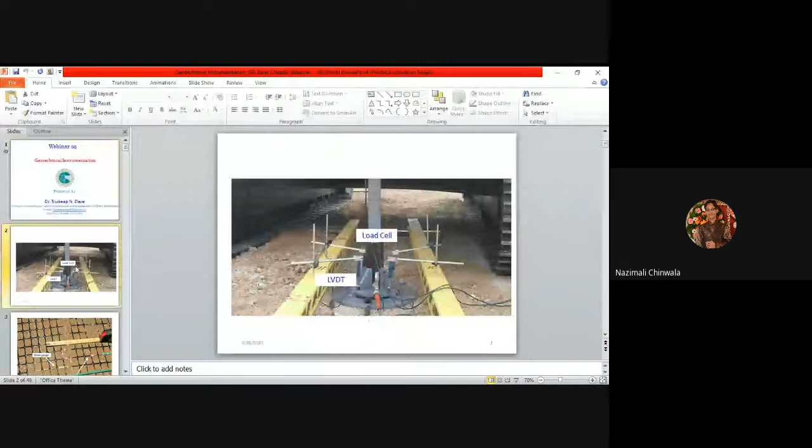When we talk about instrumentation, we may require to do the field plate load test, wherein we use load cells, LVDT, and we want to see what is the load displacement curve, or the load displacement behavior of the material at the site.

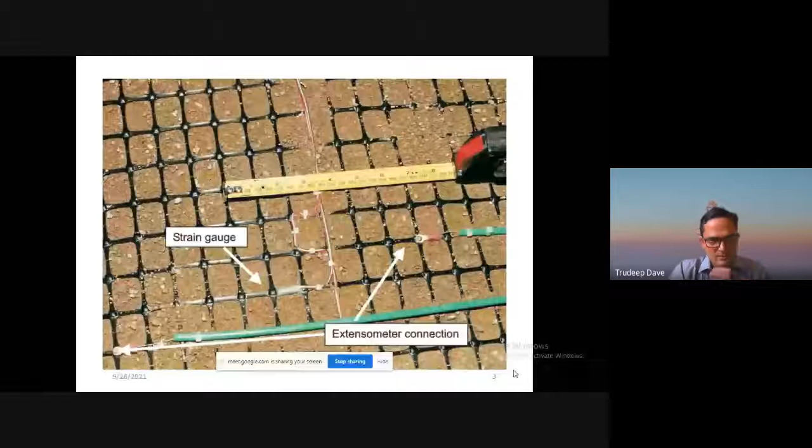We may require to monitor the strains which can occur on various geosynthetics, because it is one of the novel materials and most widely adopted nowadays in all construction activities. So if we want to see what can be the behavior of various geosynthetics, which requires monitoring the strains or the extension, we may wish to use instrumentation in the form of strain gauges or extensometers.

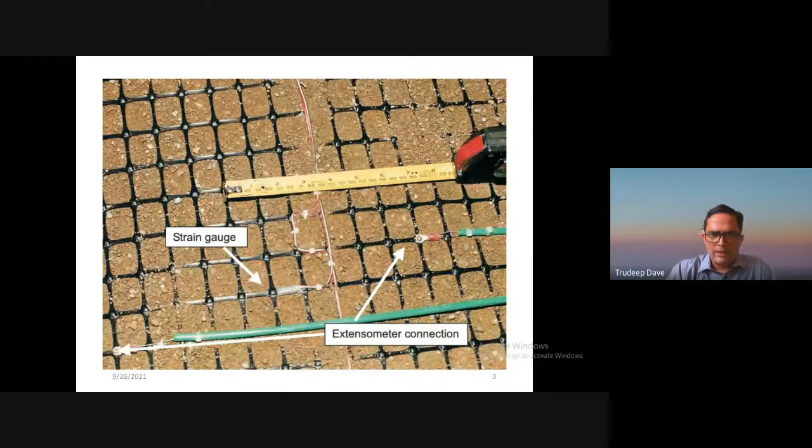In that condition, we may also have seen that various laboratory studies require displacement transducers or accelerometers, used during the shake table test or during the dynamic loading test in the laboratory environment as well.

So it has a large gamut of applications, basically ranging from laboratory scale to field scale. And that is the reason why we want to understand the appropriate or apt use of instrumentation, considering what is the application we are looking about.

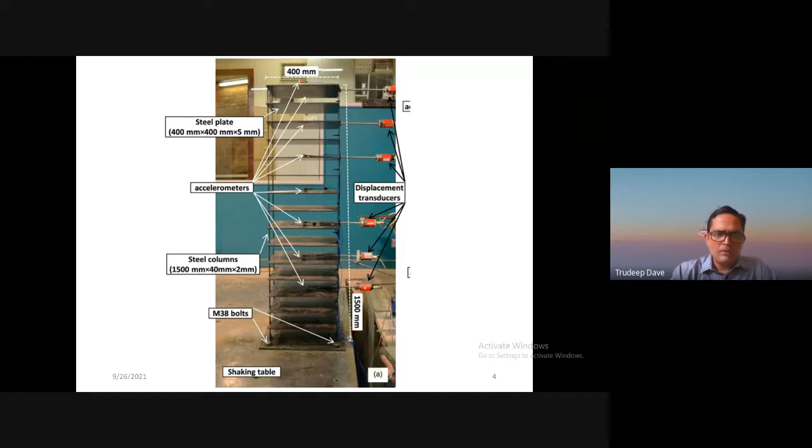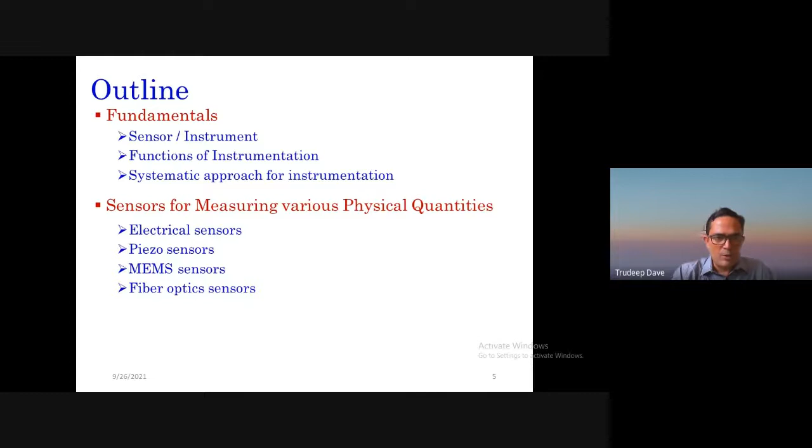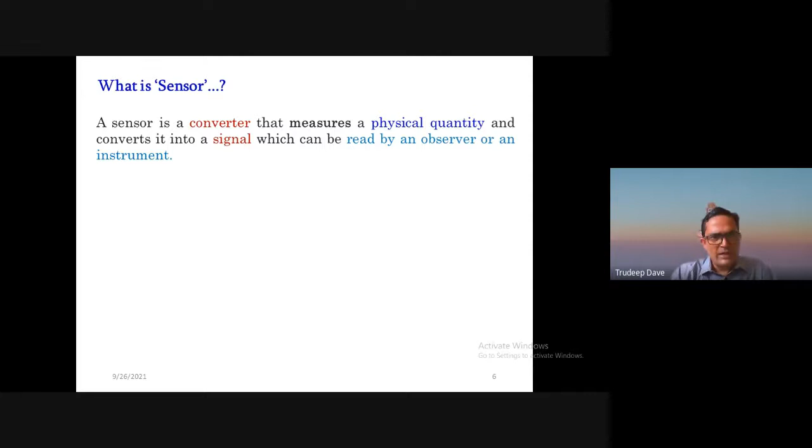So first and fundamental question - what is a sensor or what is an instrument? We can say that a sensor is basically a converter that measures a physical quantity and converts it into a signal which can be read by an observer or an instrument.

What are the physical quantities in which a civil engineer, or in particular a geotechnical engineer, is interested? We may say loading - varieties of loading, like overburden pressure or overburden loading, which can convert into gravity force, lateral thrust or wind loading. It can be seismic loading or traffic loading, or any dynamic load like blast. So depending on the loading source, we may require to monitor how much load is acting on the structure, then the structural response to that particular loading.

Because of the applied load, what are the strains occurring on the structure - whether tensile or compressive strain, displacement if it is taking place, how the displacement is happening, what kind of deformation or bulging is taking place - we want to monitor it. In many situations we may use inclinometer or tilt meter to see the response of the structure.

When we apply some sort of dynamic load, in those conditions we may need to monitor the acceleration which has been applied as a loading, if possible to monitor, and what is the response of the geotechnical structure in those situations.

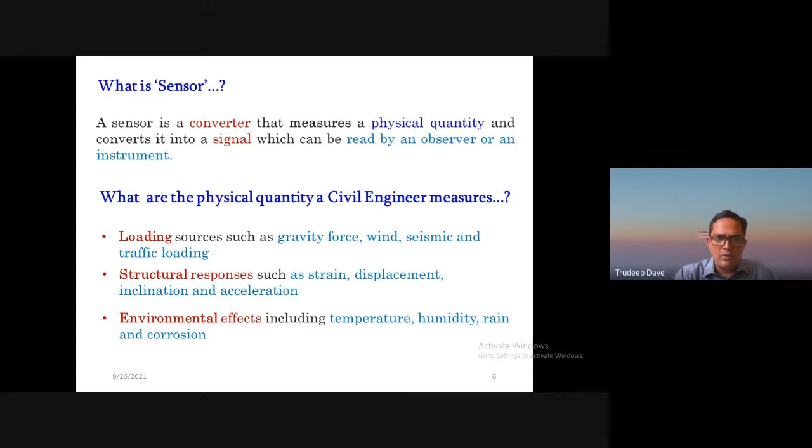After that, if we want to discuss the functions of instrumentation - this is something which we already discussed.

The third part of the first topic is a systematic approach to plan any monitoring program using instrumentation. Whether it is laboratory or field, we may require to monitor it.

What fundamental we need to look into is we need to define the project condition first. So when we say project condition, it means the loading, the boundary, the material, the parameters which we want to monitor - that also will be part of this monitoring or project condition.

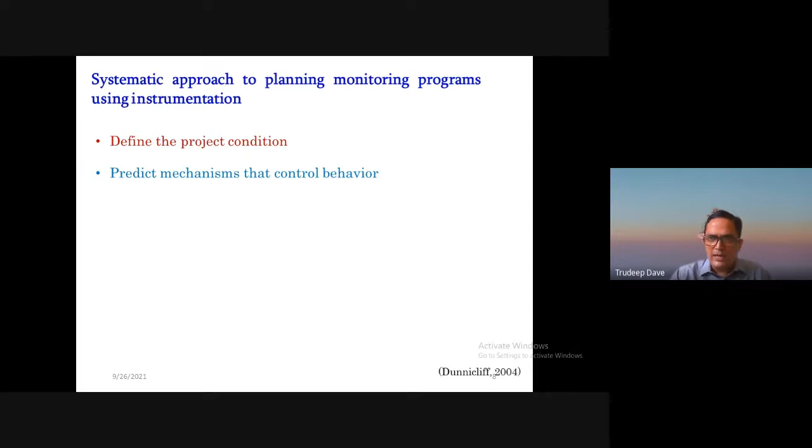Predict the mechanism that controls the behavior. So if we apply a vertical load, it is expected that a pressure bulb will generate, and based on the established theory, we can try to provide the sensors in the influence zone or the pressure bulb more, and as we move far, the instrumentation intensity can be varied or reduced.

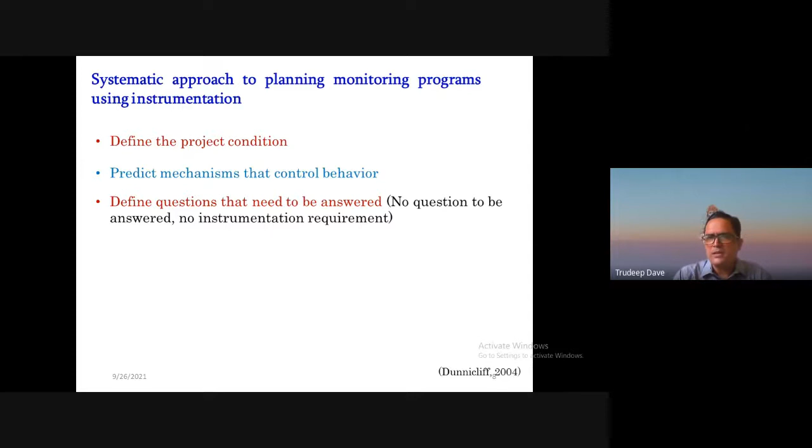Define the question that needs to be answered. Why am I doing this instrumentation, why this experimental study is important, or why the instrumentation is being used. If there are no questions to be answered, I think probably we need not do the instrumentation, but it is not the case. As we do the model study in the laboratory, small scale or 1G, or maybe large scale model study, in all those things we have a set of questions which we wish to answer, and based on that we try to provide the sensors.

Define the purpose of instrument, that is again related to the third point. If the purpose is defined, we can also think of which instrument probably can help us. For example, the scale of measurement - if I apply loading in the laboratory environment, the scale of loading would be different than if I want to measure the same in the field. So the same instrument which I wish to use in the laboratory may not be apt to use in the field.

When we talk about the centrifuge test, we may wish to use miniature sensors, which are very small in dimension and will not obstruct the phenomena occurring at NG level. But when we try to monitor the same thing in the scaled model, for example dimensions maybe 1 to 3 meters, and still in the laboratory, probably the sensor dimensions are such that they are larger than miniature, but should not be so bulky that it obstructs the phenomena to occur.

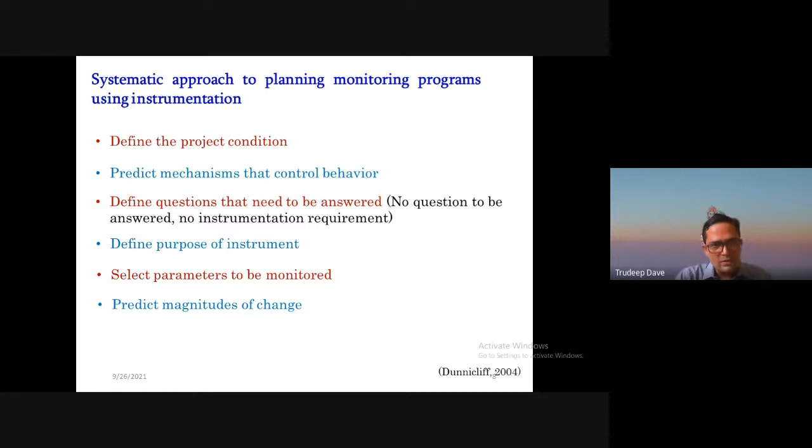Select parameters to be monitored, whether it is stress, strain, pressure, or displacement or any other thing, and predict the magnitudes of change. One is what is the fundamental minimum pressure, stress or strain which is likely to be there, and what is the magnitude of changes which could occur. That is also required to be predicted - not exactly, but it will help us select a proper instrument. So these are sort of required things.

If we say that this instrumentation along with the data logger is basically forming a health structure or maybe geotechnical health monitoring system, basically it consists of a sensory system. Then the sensory system is connected to the data acquisition system. If it is required to be amplified, then some transition may also be there.

Basically it will help us to monitor, and then whatever data we are getting, it will be the input to the computer, and we'll try to do the data processing, and we'll try to analyze what are the results or what are the outcomes which we are getting from the system.

And we need to manage the system. Many a time what happens, we get some noise, we get some disturbance, and all those unnecessary things are required to be filtered. After that, we need to make the decision.

If it is about the laboratory, we can say that this is the phenomena which is observed. If it is about the field, and if the behavior is not as desirable, and if it is exceeding the limits, we need to make some decision in the form of some sort of retrofitting, or some sort of strengthening. So all those things will come into the picture, but that is a part and parcel of the instrumentation.

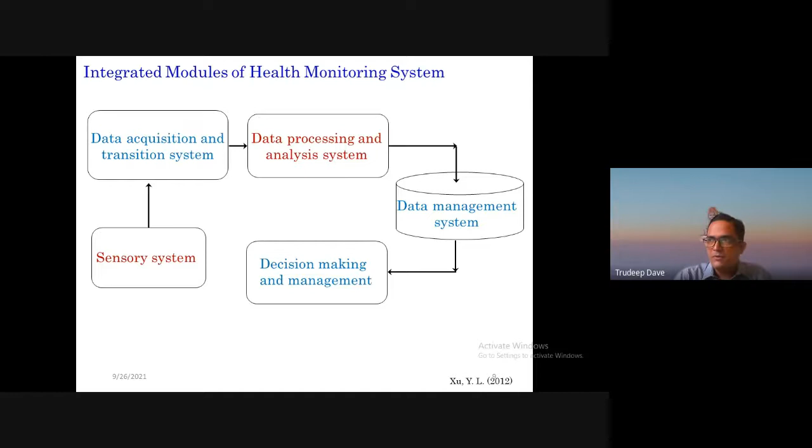So if instrumentation is done, we can monitor it more precisely as compared to doing the retrofitting once the distresses are visible by naked eye, or once the failure has taken place. So it is better to prevent it with the help of instrumentation than doing the remedies.

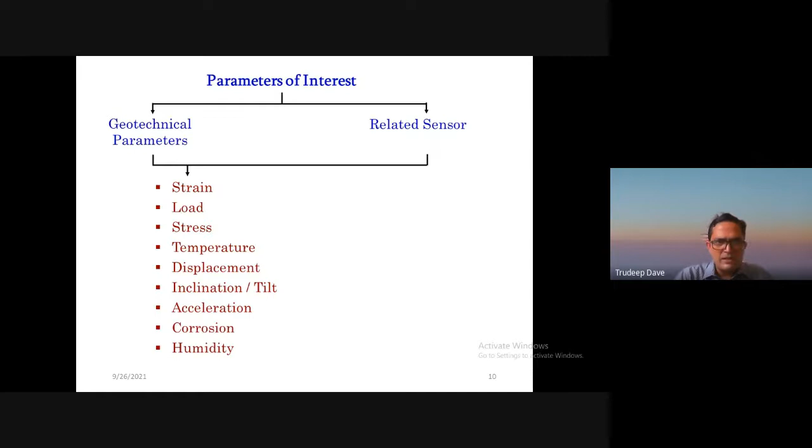Based on the parameters which a geotechnical engineer is interested in, we can have strain, load, stress, temperature, displacement, tilt or inclination, acceleration, corrosion, humidity. These are some of the basic things which geotechnical engineers or geo-environmental people are looking into.

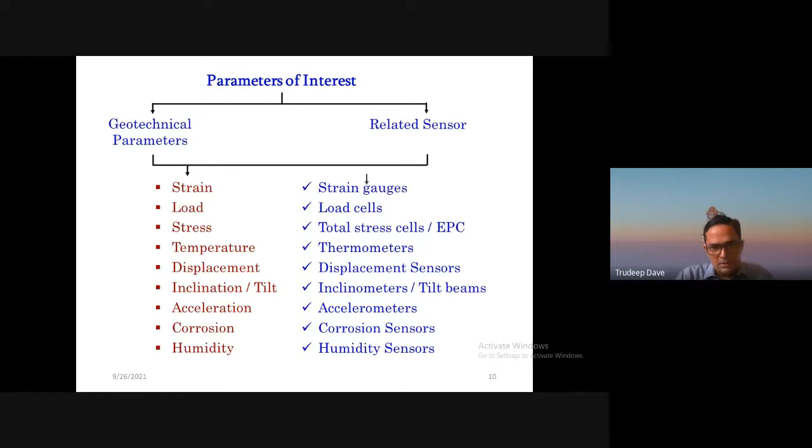Based on that, we have a set of sensors which we would like to use to measure these geotechnical parameters. Based on the physical quantities which we want to measure, and the operating mechanism, the sensors can be grouped into four types: first, electrical sensors; second, piezo based sensors; third, MEMS sensors; and fourth, fiber optic sensors.

Out of these four, most of the geotechnical studies which are ongoing in the laboratory emphasize, or rather use, the electrical sensors. So let us begin with that.

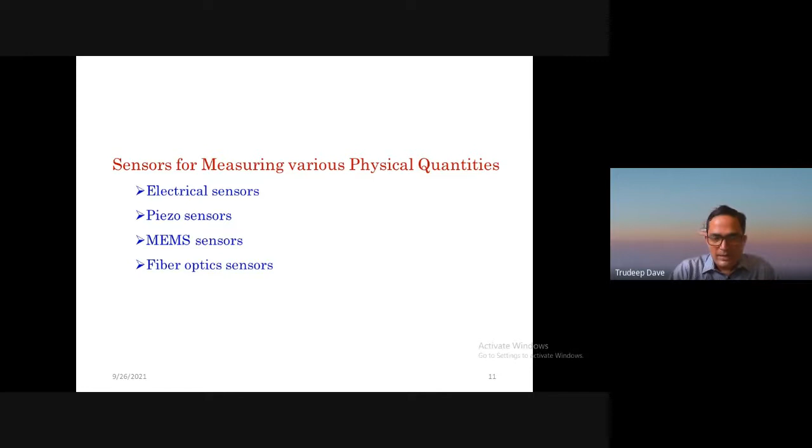In these electrical sensors, strain gauge is one of the mainly used sensors. If we try to group strain gauges, they can be foil type strain gauge, which is widely used; second, vibrating wire strain gauge; and third, fiber optic strain gauges. The fiber optic part we will discuss at a later stage. But if we talk about the foil type strain gauge, it basically consists of different things.

The philosophy of this particular sensor is that when some change or deformation takes place, the electrical resistance changes. Strain gauges offer electrical resistance, generally 120 ohms or 350 ohms. Whenever some extension is taking place, for example in the geotextile or geogrid, based on that the gauge length would change a bit, and it will change the resistance, and that changed resistance is proportional to the amount of strain applied. This is the sort of principle of working.

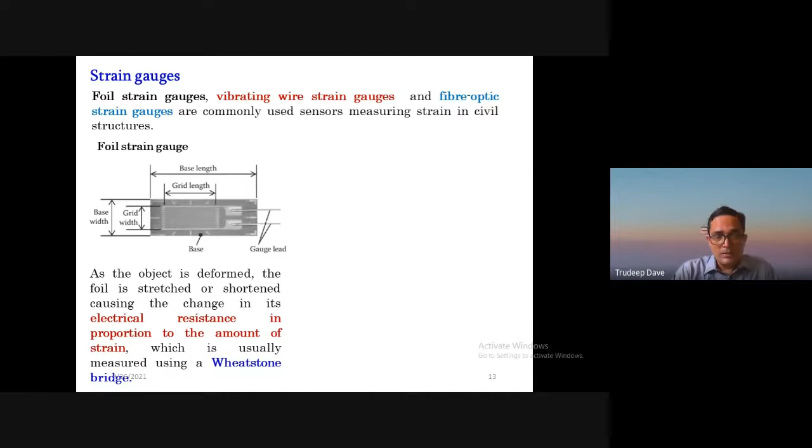Many a time these foil type strain gauges are converted into Wheatstone bridge circuits so as to get precise measurement. If we talk about the other type of strain gauge, it is the vibrating wire strain gauge.

They have a thin steel wire which has been anchored between the two ends, and this wire vibrates due to excitation. If some load is being applied or some pulse is being provided to it, it will vibrate, and then whatever resonant frequency is there, it will try to catch that.

The benefit of vibrating wire sensors is that it can transfer data over long distances, on the contrary to foil type gauges which have a limitation - we may get signal deterioration over the length. So longer the cable, there is more chance that the signal may be lost or deteriorated. But in case of vibrating wire, we can get better data as an output.

But the disadvantage is that it is bulkier in size. Foil type strain gauges are very small and can probably be used at several places, on the contrary to the vibrating wire strain gauge.

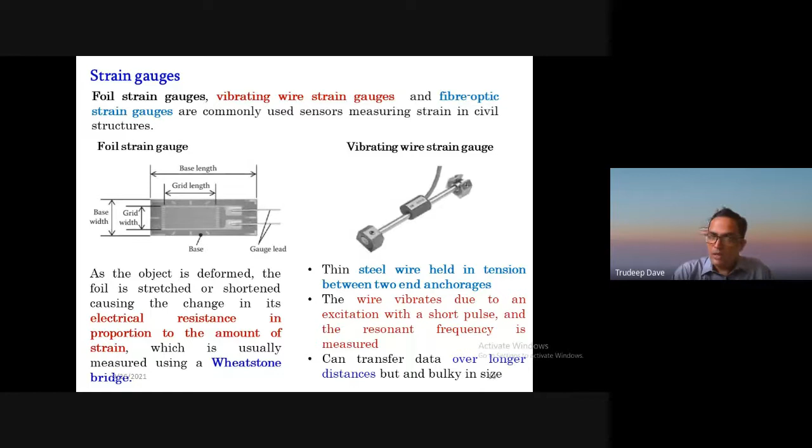Now when we talk about this foil type strain gauge, I would like to give bit more emphasis on that because it is one of the largely accepted or used sensors. So when we talk about this foil type strain gauge, it basically consists of...

a strain gauge which is connected to a Wheatstone circuit, and this circuit has 4 resistors, R1, R2, R3, R4. Out of that, one is connected to the strain gauge, and whatever variation is being measured, it will be because of the change in the resistance.

Now this particular circuitry may have the effect of temperature changes, or it may have disturbance because of the temperature changes. That temperature change can be compensated, can be reduced, by connecting another strain gauge with the Wheatstone bridge circuitry, in which the measurement strain gauge is connected to one part and it is stressed, whereas the other strain gauge is kept idle, just monitoring the temperature resistance. Then whatever change is observed, the proportion in that measurement will help nullify the effect of temperature, and the actual quantity to be measured can be the output.

The third kind of system in which we may wish to use all the strain gauges as measurement units will have the benefit over the quarter bridge strain gauge of better temperature stability and minimum temperature induced measurement error.

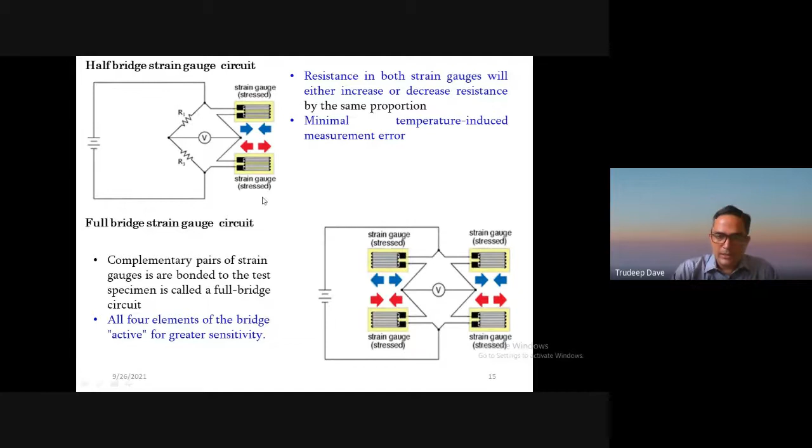So this full bridge strain gauge circuit is widely used when we talk about load cells, or pressure cells like earth pressure cells or total stress cells, which have the common functioning parameter of the full bridge or Wheatstone bridge circuitry with 4 strain gauges, many times, or even more, used on the sensing surface, which helps to get the output in a more systematic way with better sensitivity.

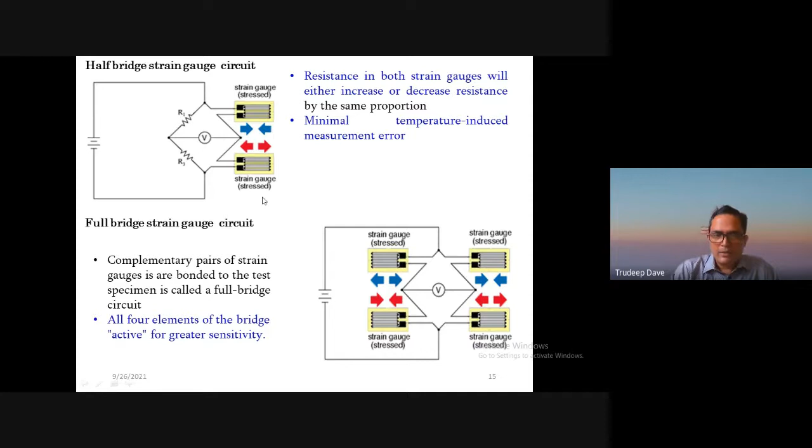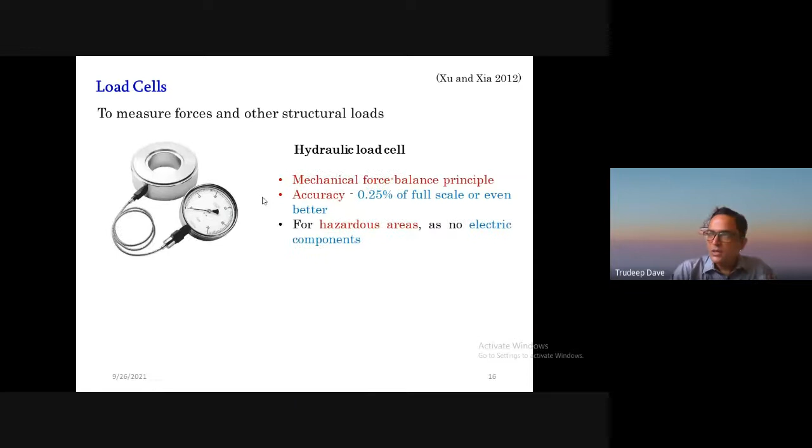The second type of sensor which I wish to discuss is the load cell. We have discussed about strain gauge, and this strain gauge may many times be used in the load cell, but there are other types of load cells also. The first type is the hydraulic load cell.

This hydraulic load cell mainly has a dial, and the load cell has a fluid which is filled in the sensor. Whatever force is applied on the sensor, the fluid will be pressurized, and that pressure is transferred and monitored with the help of the gauge. It has an accuracy level of 0.25% at full scale, meaning the maximum range of measurement, so it can help us get accuracy in that range.

The benefit is that as there is no electric component, it can be used in areas which have hazardous effects and the like.

The second one is the pneumatic load cell, which basically operates on the effect of air pressure application. Whatever pressure is applied mainly changes the pressure of the air below the sensing face of the load cell. There can also be a compensatory surface that nullifies the pressure and brings the sensing face back to normal. That is the principle of air pressure used to find out the changes in the load.

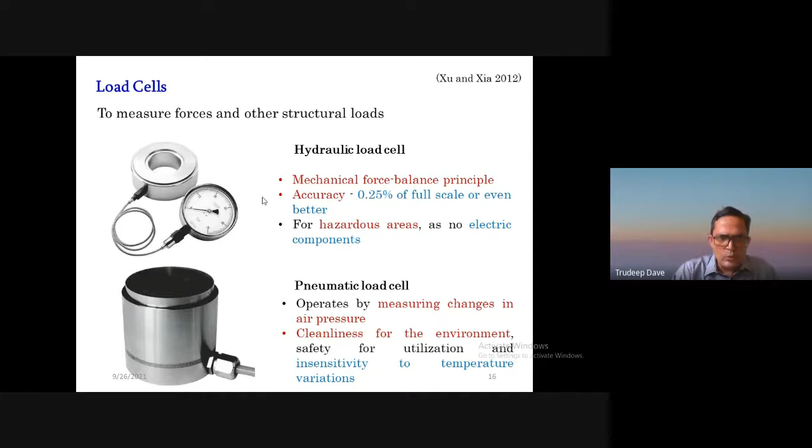And it has the benefit that it is mainly insensitive to temperature variations.

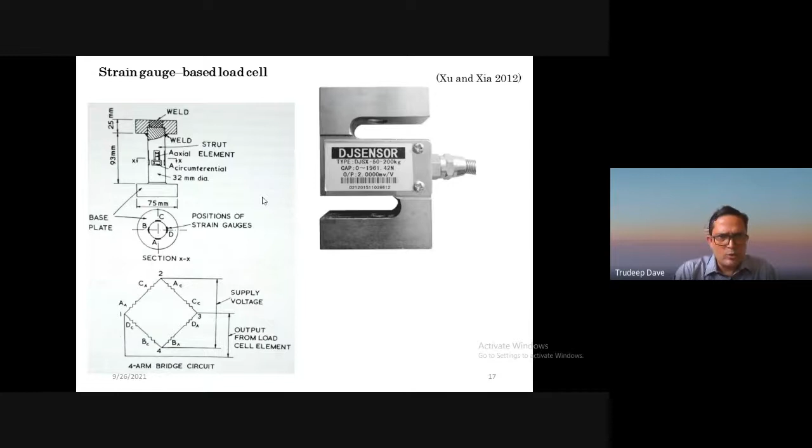The third and most commonly used type is the strain gauge based load cell, which converts the load into an electrical signal. As the material deforms, the load cell sensor strain gauges will also get affected, and it will convert into equal strain in all the sensory parts. This is what we have seen in the previous slides, the internal connection of the strain gauges.

The fourth type of load cell is the piezoelectric type, in which when load is applied on the sensing face, charge is generated in the quartz sort of crystals, which are the piezoelectric material. Based on the applied load, electrostatic charge is generated proportional to the applied force. So the load is applied, charge is generated, and the changes in output voltage are measured, mainly because of the electrostatic changes.

It is widely used for dynamic applications. The reason is that the pneumatic type of load cell, oil based load cell, or strain gauge type of load cell may have lag in the response. So it may happen that load is applied, but immediately another wave comes, and the signals generated and logged may have some interference effect, which may not be as predominant in piezoelectric type load cells. Because of this, people often use this type of load cell particularly for dynamic applications.

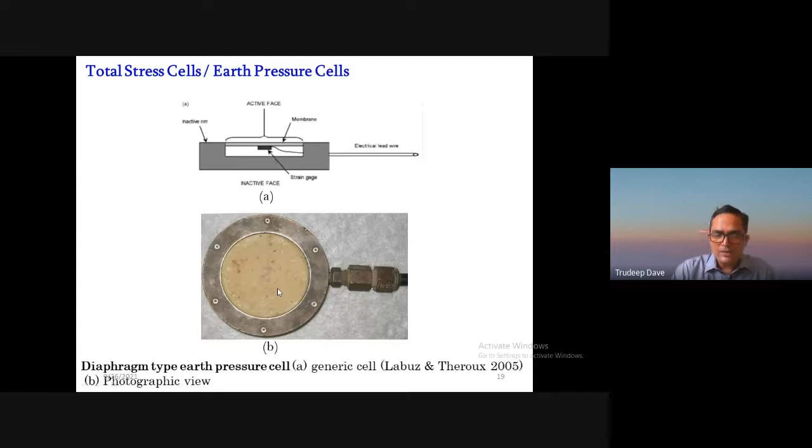Whatever changes are being monitored is through the active surface only. This active surface should be made flush with the surface on which measurement is being done. If the active surface is projecting out, its effect would be different. If it is below the surrounding surface, its effect will also be different. So we need to put it flush with the surrounding surface, and that will help us get a proper outcome in the form of earth pressure.

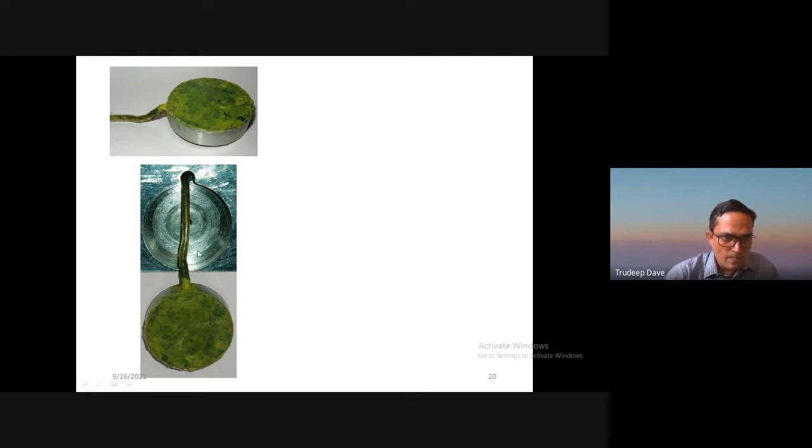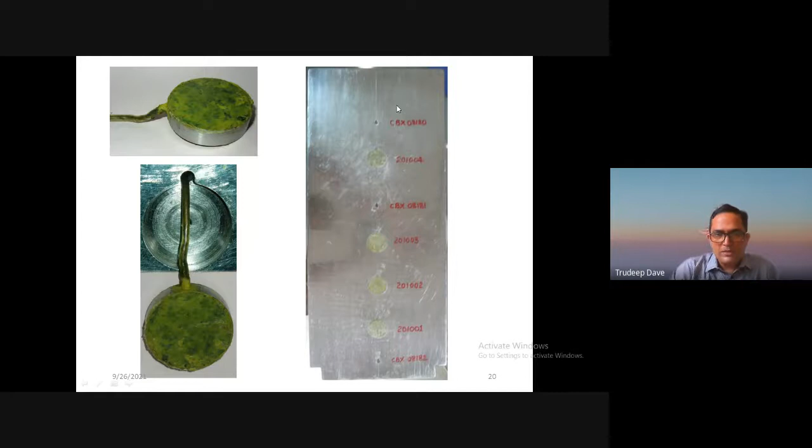For example, this earth pressure cell mentioned here is to be used for measuring the earth pressure in a retaining structure. So let us say this is the model retaining wall. We need to make a groove in order to provide this earth pressure cell flush with it. Here we can see these sensors are installed flush with the surrounding structure, and only the pressure will be measured with no other effect.

In earth pressure measurement systems, new technologies have come up in which two polymeric sheets with semiconductive ink printed on them are pressed together, such that the printings are orthogonal in both sheets. One is in the length direction, the other in the width direction. One forms the columns, the other forms the rows.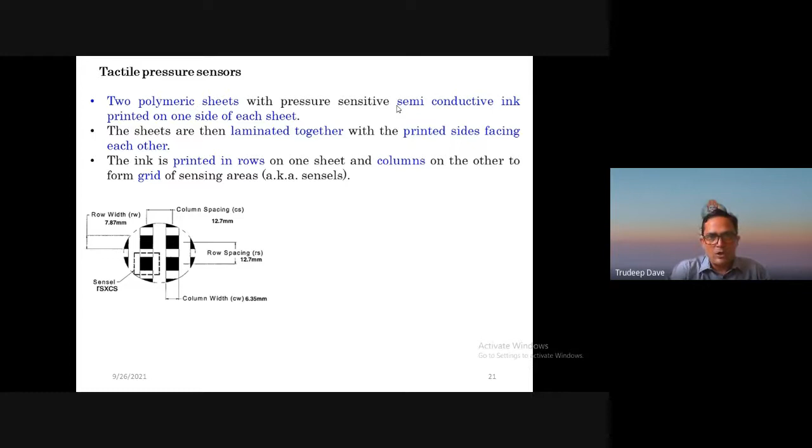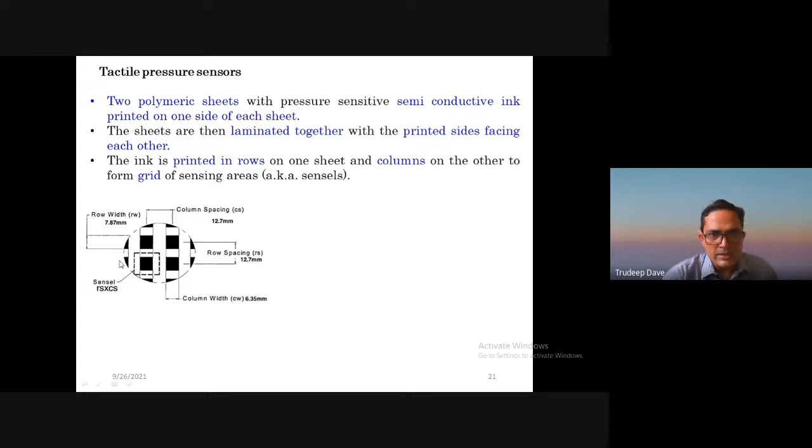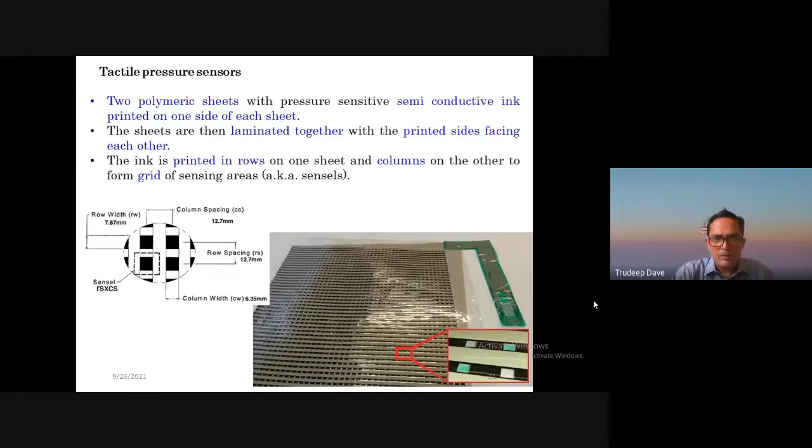That is how this tactile sort of pressure cell is formed, and these smaller parts visible here are called sensels. There is a large grid of sensels formed, and when pressure is applied on this region, each small sensel gives us the variation in the conductance of that area.

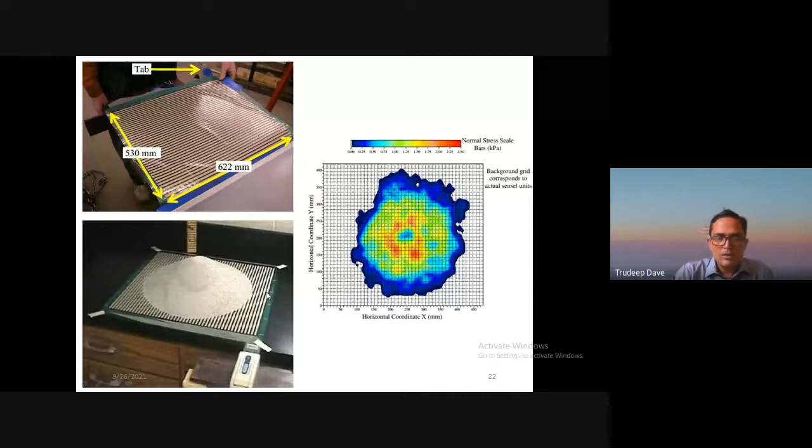The next type of sensors we wanted to discuss today is thermometers. When we say thermometers, we all know the conventional thermometer, but in instrumentation for geotechnical applications, we may wish to use thermocouples, thermistors, or RTDs. These thermocouples mainly consist of two cables which are of dissimilar materials.

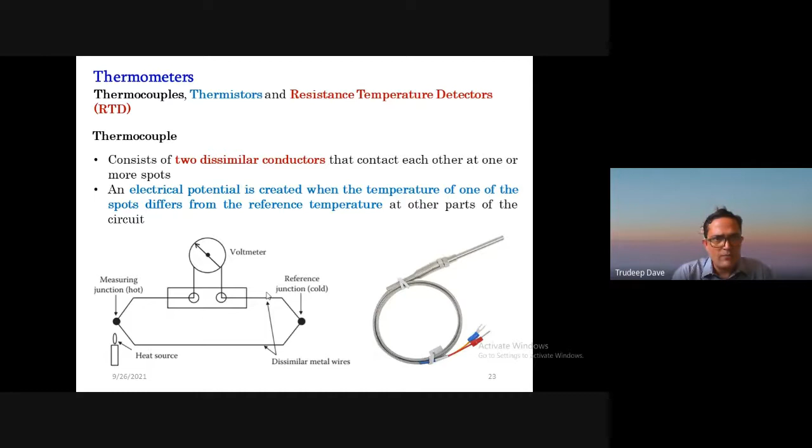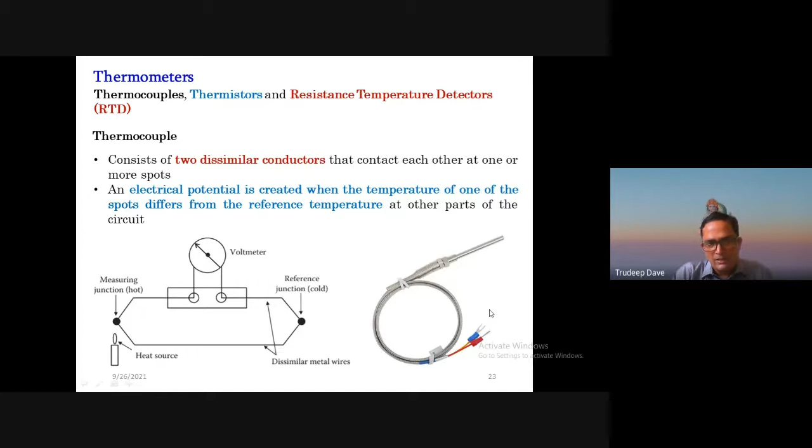The electrical potential is created when the temperature changes - one is the reference cable and the other has a change in conductance, and that difference is the effect of the net temperature difference. So the electrical potential is created when the temperature of one spot differs from the reference temperature. Of these two, one is called the reference junction and the other is called the measurement junction.

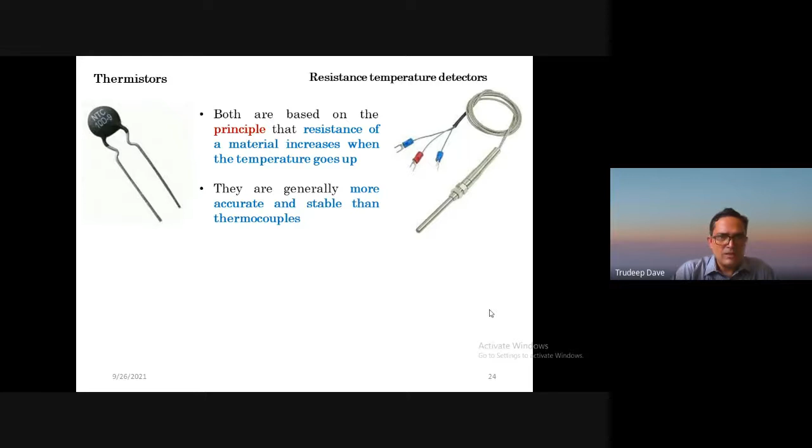When we say thermistor or RTD, resistance temperature detectors, both have similar principles: the resistance of a material increases when the temperature increases. The difference between these two is primarily the accuracy, and the second thing is the material used to form these sensors. Thermistors are mainly made up of ceramics or polymers, while RTDs are made up of platinum. When we talk about sensing, RTDs have a large temperature range to be monitored, but the accuracy of thermistors is much better than that of RTDs.

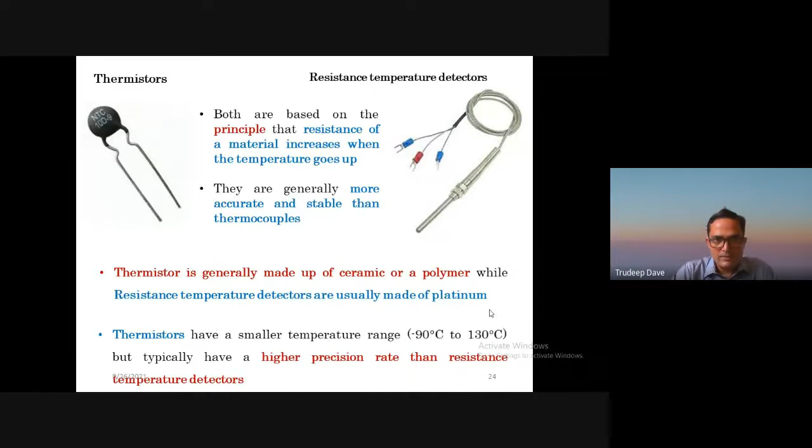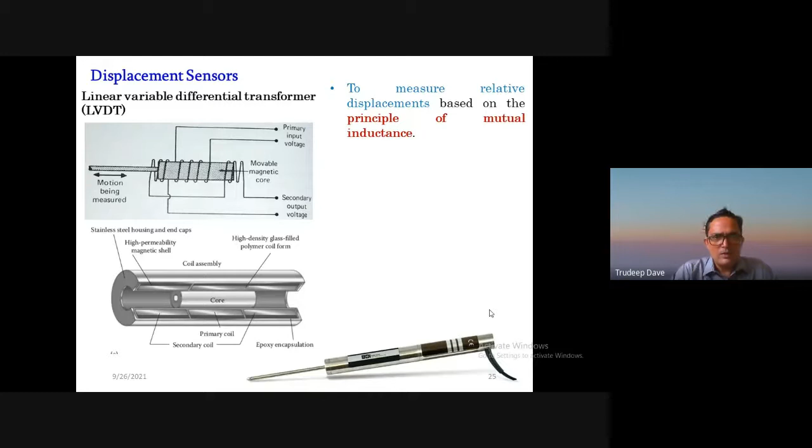The next one is the displacement sensor, also called LVDT or linear variable differential transformer. LVDTs are mainly used to measure relative displacement, based on the principle of mutual inductance. Initially the core of the sensor is at the central portion, and it has two secondary coils at the periphery. When the core is moved either outward or inward, there is a voltage that either increases or decreases in the secondary coils, creating a voltage difference, and that difference is monitored with the help of this type of sensor.

The next type of sensor we can discuss is tilt beams or inclinometers. Nowadays inclinometers are widely used in earthen dams and RE walls, reinforced earth walls, with two intentions. Once construction is done, if there is some outward movement expected in the RE wall, this inclinometer will give us the idea that movement is taking place and we need to stabilize the structure. Several RE walls are feeling distresses and deformations, bulging of panels outward, misalignment. All these are because the reinforcement may not be sufficient, or the friction offered by the reinforcement may not be sufficient, so pull out or rupture occurs, causing the RE wall to bulge. This bulging or movement can be monitored with the help of inclinometers.

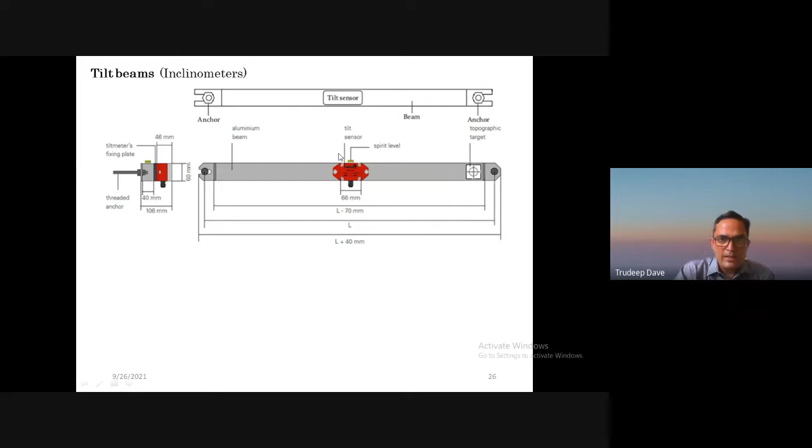As we can see here, a tilt sensor is placed and anchored at both sides. To measure displacement, differential displacement or angular rotation in bridges, dams, tunnels, and buildings, we can use tilt beams or inclinometers. It is installed in the horizontal direction when we want to monitor settlement, such as in the case of tunnels. But when we install it in the vertical direction, we want to see the lateral displacement or rotation, as in the case of RE walls. These sensors give us the differential displacement, and it has a precision bubble liquid which can conduct electricity, sensed as a resistance bridge.

This inclinometer can nowadays be of two types. One is the stationary sensor, generally installed in the structure and left for a longer period. Those kinds of units are mainly used when sensing is to be done at very few locations. But when measurement is required at several locations, we may not use the stationary type of tilt beam or inclinometer; instead we need to use a sensor which can be inserted with the help of a reference bore, and then after measurement we can bring it out and go to the next point and again find the inclination or whatever desired parameter.

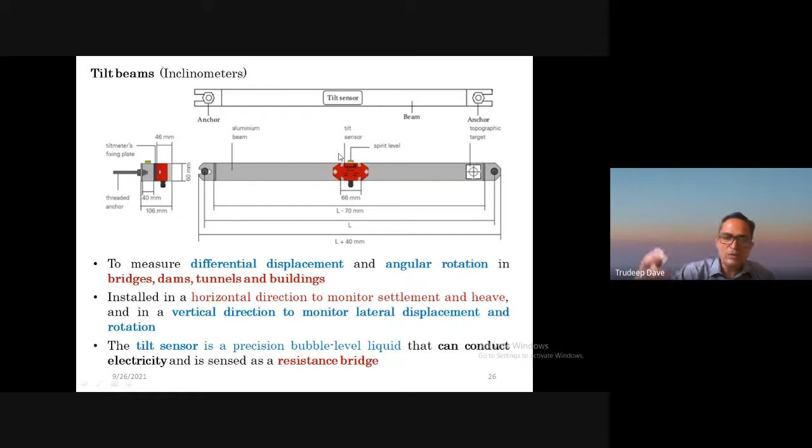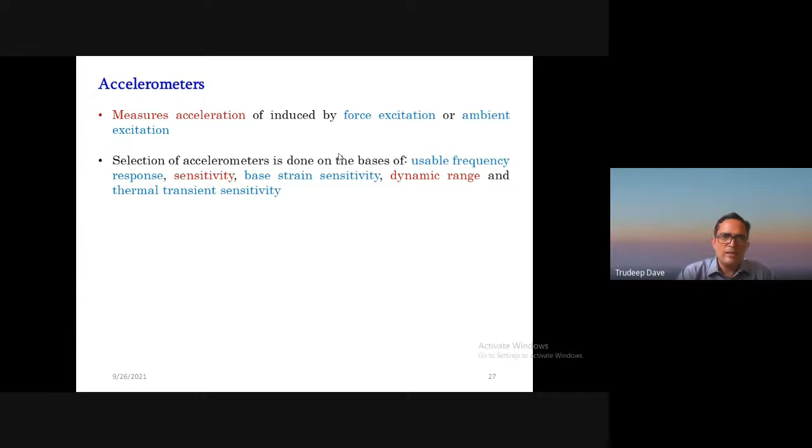The next type of instrument is the accelerometer, which mainly measures the acceleration induced by force excitation or ambient excitation. When selecting accelerometers, they should be chosen on the basis of usable frequency response, sensitivity, base strain sensitivity, the range of dynamic loading expected, and the thermal transient sensitivity. All these parameters need to be kept in mind while choosing a sensor.

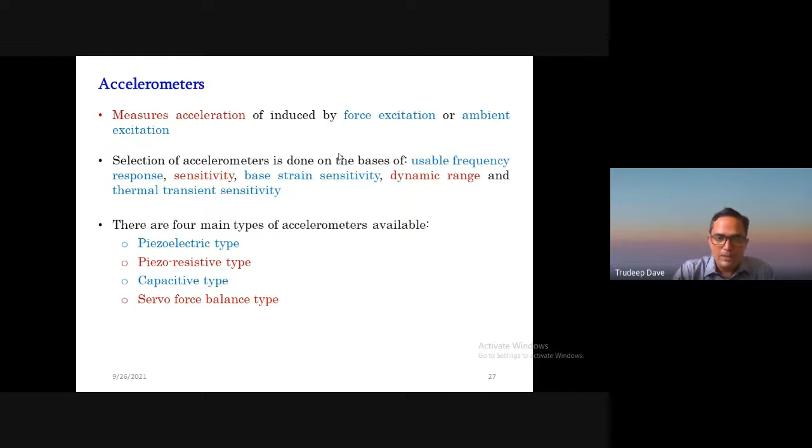There are mainly four types of accelerometer: piezoelectric type, piezoresistive type, capacitive type, and servo force balance type. We start with the piezo type of sensor, classified on the basis of the working or operating principle.

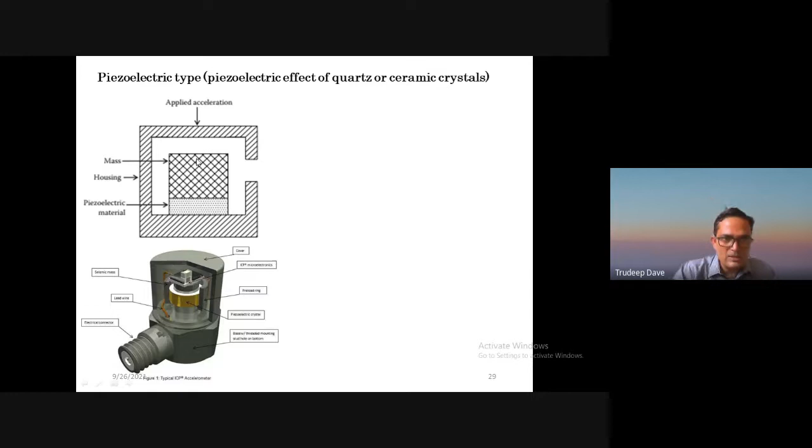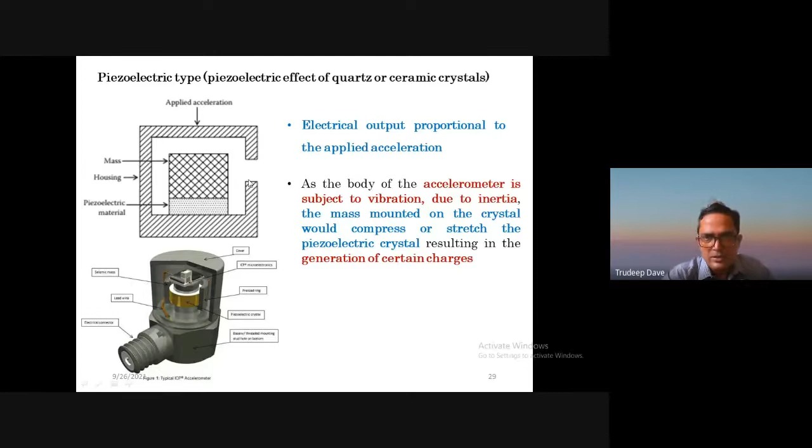A piezoelectric sensor essentially consists of a piezoelectric material on which a large mass is placed, and the electric output coming out of this is proportional to the applied acceleration. When the body is subjected to acceleration, due to inertia, the mass mounted on the piezo crystal will compress, moving either in the vertical or horizontal direction. As it compresses, expands, or stretches, the piezo sensor connected to it exhibits a change in electric charge, and that is monitored.

It is not suitable for very low frequency ranges in civil engineering applications. In mechanical engineering, piezoelectric type sensors are mainly used for high frequency ranges, whereas in civil engineering we need sensors for low frequency ranges and high G levels.

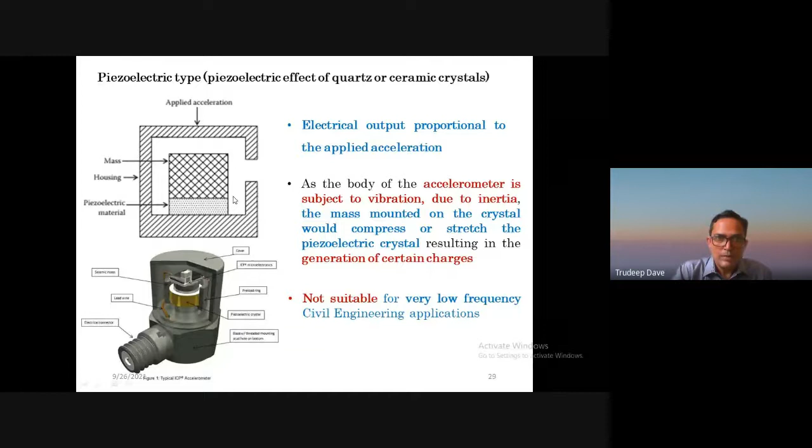Generally we don't use piezoelectric type sensors in geotechnical engineering applications, but the piezoresistive type of accelerometer is quite commonly used there. It works on the principle that the electrical resistivity of a semiconductor or metal changes because of applied mechanical strain. There is a proof mass, reference resistors, and piezo resistors.

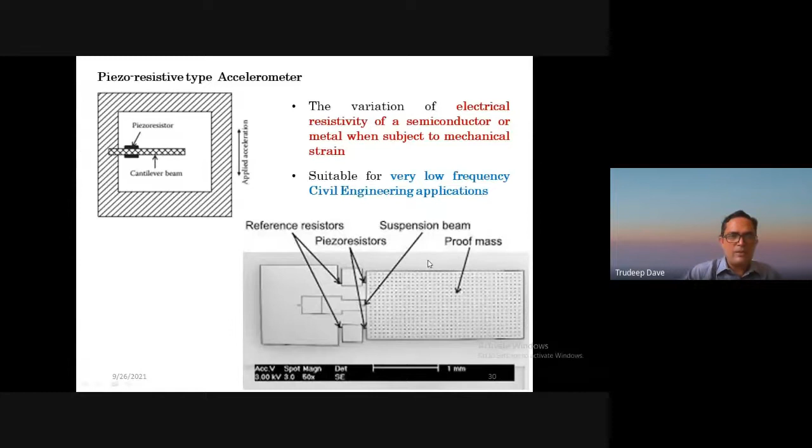The suspension or cantilever beam moves in the direction of applied acceleration, so if applying in the horizontal direction, it must be oriented accordingly, and if vertical, the cantilever beam is set to allow movement in the vertical direction. These sensors are placed in the direction of application or measurement, and they are suitable for low frequency civil engineering applications, such as dynamic loading on retaining structures or foundations, or monitoring the effect of traffic loading on retaining structures or surrounding structures.

The third type is the capacitive type of accelerometer, in which the mass is connected to a spring type assembly. When subjected to vibration, this mass moves upward or oscillates, and it is connected to two capacitor plates. Because of the vibration, the moving mass alters the distance between the two capacitor plates, as one is connected to the mass while the other is stationary. Based on the displacement, the capacitance changes, and the electrical current or voltage is monitored accordingly.

Piezoresistive and capacitive type accelerometers are adequate for flexible civil engineering structures, such as earthen embankments, RE walls, foundations, and piles, giving a wide variety of applications. Capacitive types are very accurate and appropriate for low frequency ranges.

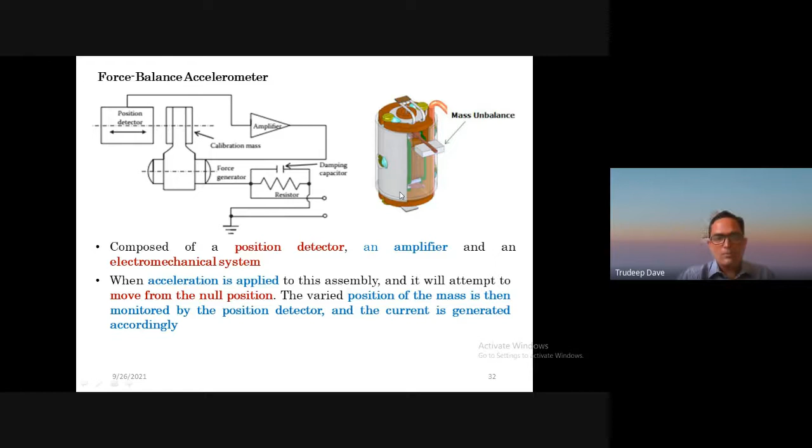The fourth type of accelerometer is the force balance type, which has an unbalanced mass, a position detector for the mass, an amplifier to amplify the signal, and an electromechanical system. When acceleration is applied, the mass moves either upward or downward compared to the null position, and as the position varies, it is monitored by the position detector, generating current accordingly. This is why it is called a force balance accelerometer, and it has high accuracy and low hysteresis after each cycle.

The next type of sensor—so we have started with the electrical type of sensors, then the second one was piezo type of sensor, the third one is MEMS type of sensors, micro electromechanical system of sensors.

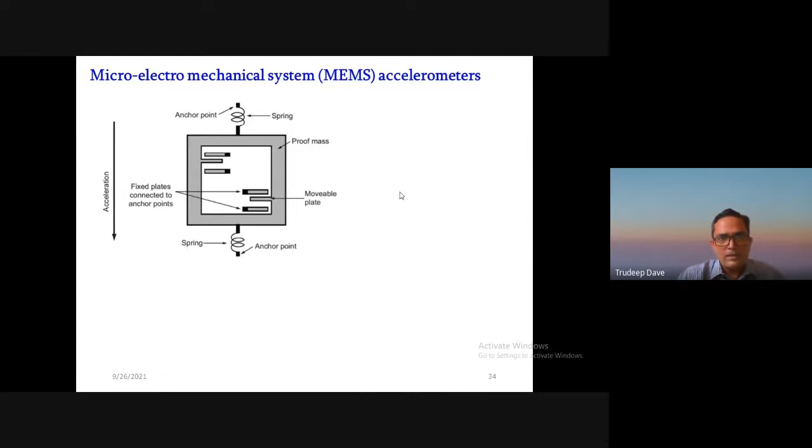This type of sensor, when we try to use, is generally found in dynamic loading applications.

Here we can see the accelerometer, MEMS type accelerometer, which has a proof mass or a body. It has a movable plate and a fixed plate in two different locations. Based on its anchor point, the spring will extend or compress depending on the acceleration, and it will monitor the movement of the movable plate in comparison to the fixed plate.

So this is a sort of schematic, but in actual they are very small in dimension, and for this a sort of system is to be followed. For any application, this MEMS type of sensor can be different.

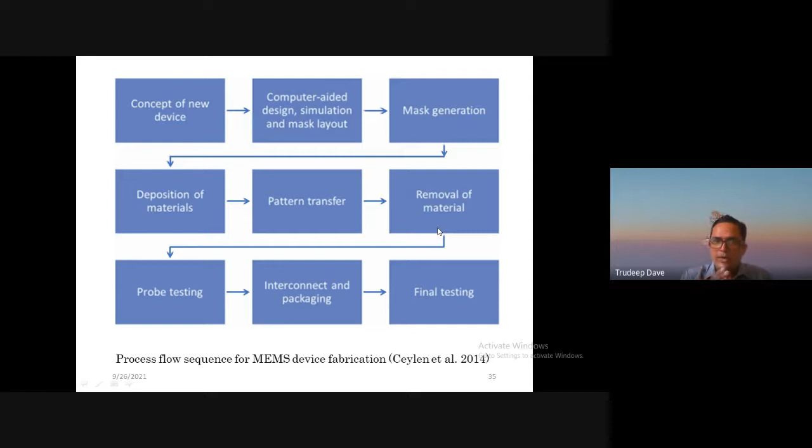So whenever there is a concept of a new device, this is the type of flow which they provide, and final testing is done on the derived sensor. This is quite interesting to see, as the sensor consists of deposition of material to formulate a pattern, and the removal of excess material, and we need to calibrate it before actual use.

It has a large gamut of applications. They are used in asphalt pavements, concrete pavements and bridges, and in foundations. The type of measurement it can help us with includes resilient modulus, pavement roughness, and temperature. So a large variety of measurements—MEMS type sensors are not only related to highways. Depending on the application, we can also think of what other measurements we would like to have.

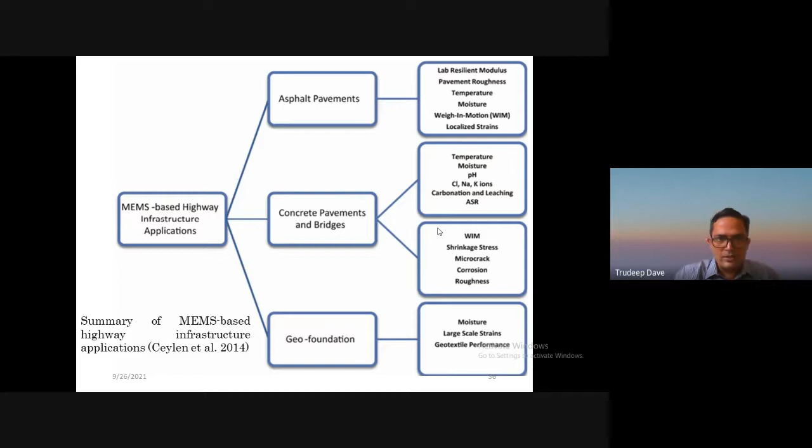The next type of sensor is called optic fiber or fiber optic sensors, which mainly work on the principle of the light which is moving. The response of the material to the motion of the light is being measured. These fiber optic sensors are useful for strain, temperature, pressure, and other measurements as well.

Based on the working principle, we can classify them basically into two categories. One is called point sensors, and the second is distributed sensors, or DOFS. These point sensors can be classified into intensity modulated, interferometric, fiber optic, and spectrometric types.

So these are some of the sensors which are slowly and gradually getting acceptance, and it is still under research—in which application, how much accuracy, and what is the reliability of this sort of sensor. People are still working on this type of sensor.

FBG, for example, is one of the widely used types of sensors when we talk about health monitoring of any system. Nowadays FBG has shown acceptance, but for laboratory scale measurement, people have still not widely used it, and we are still relying on the electric type of sensors.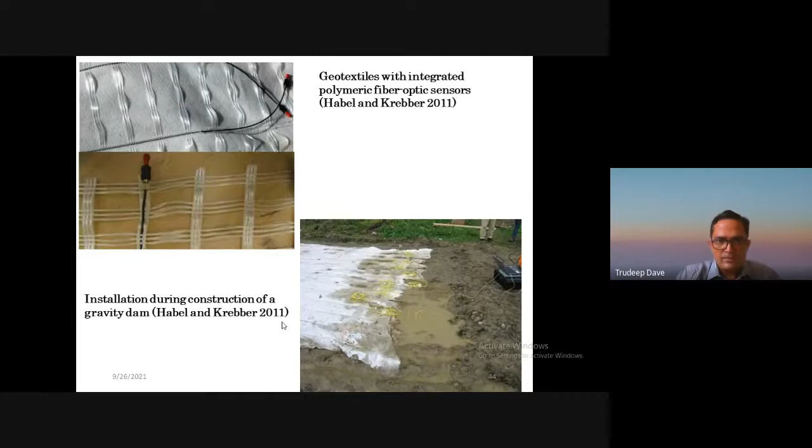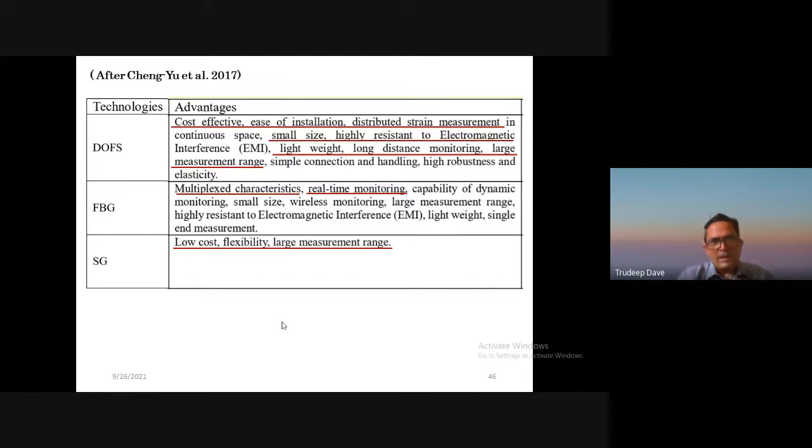So in a nutshell, these fiber optic sensors are categorized based on the scattering of the sensors, and advantages and disadvantages of these sensors are also noted.

These slides I will share with you, but the idea behind this is that when we use these sensors, the level of difficulty of knowing them increases from first to second to third to fourth. They are grouped that way—it is easy to deal with electric type sensors, then piezo type sensors, then MEMS type sensors, and the last, most difficult, is the optic fiber or fiber optic sensors.

But as we consider, strain gauges have been used for more than 80 or 100 years, and compared to that, these optic fiber sensors are slowly gaining acceptance in society and in the construction industry.

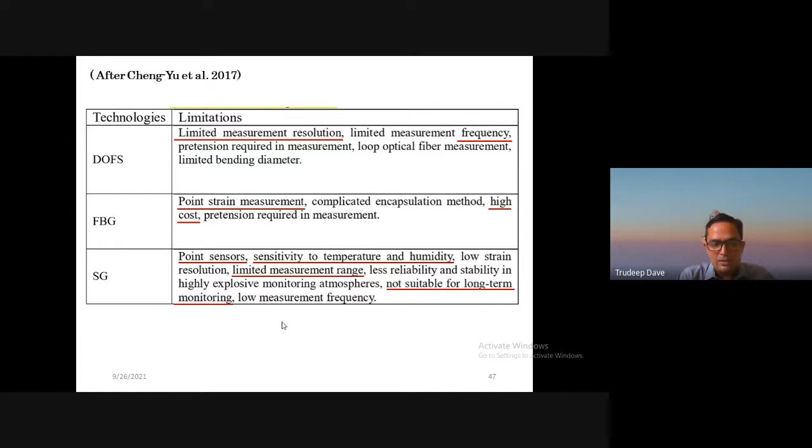Based on the application, we need to consider all these factors. There is no single sensor which can be used in all conditions at all places. For example, if I consider the electric type of sensor, it has its own benefits, its own limitations. Similarly, sensors used in the field are very well acceptable there, but the same thing may not be acceptable in the laboratory environment.

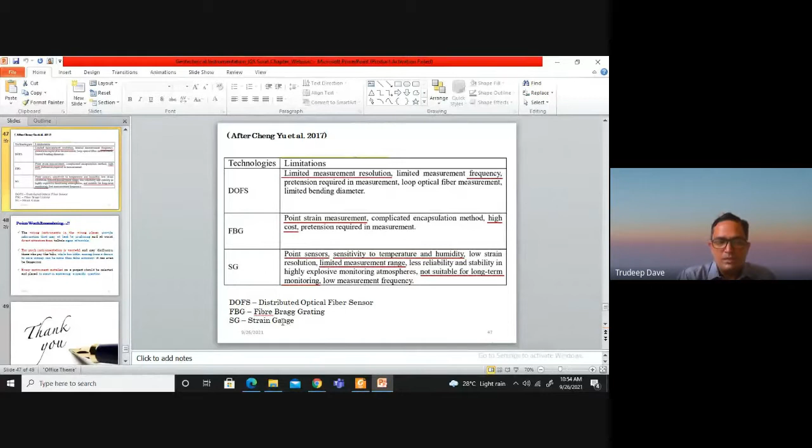About the different types of sensors, as we want to crisp up this presentation and carry it away with us: the wrong instrument in the wrong place provides information that may be confusing, and it is going to increase the difficulty or trouble for us. So wrong instrument at wrong place is of no use to anyone.

Second, too much instrumentation is wasteful. If someone says I will provide the sensor at every location and it will help me, that may be a wrong perception, or it may be an illusion that increases the bills.

If we provide too little instrumentation, just putting two sensors because we are in a crunch of funds, it may save money, but it will be a false economy, because we need to provide the minimum number of sensors to get the profile and clarity, since some regions are more prone to giving the idea about pressure, stress, or whatever measurement we are interested in.

Depending on where the priority or focus is more, we need to provide sensors at closer spacing or more intensity, as the zone of importance changes. There are some zones in structures which are safer compared to zones more prone to damage or danger, so we need to orient the instrumentation accordingly.

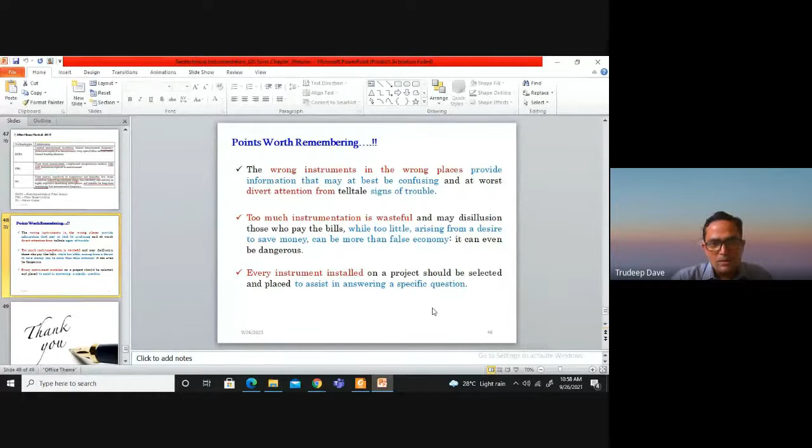Another example: if I want a sensor to monitor accuracy of even 1 mm, then I need a sensor that gives displacement accuracy of 0.1 or even better. That is how we choose any sensor. If the displacement range is too low, there's no point using displacement sensors - we need to choose another type of sensor that will give a better outcome. That is how we need to look at a particular sensor when we need to use it.

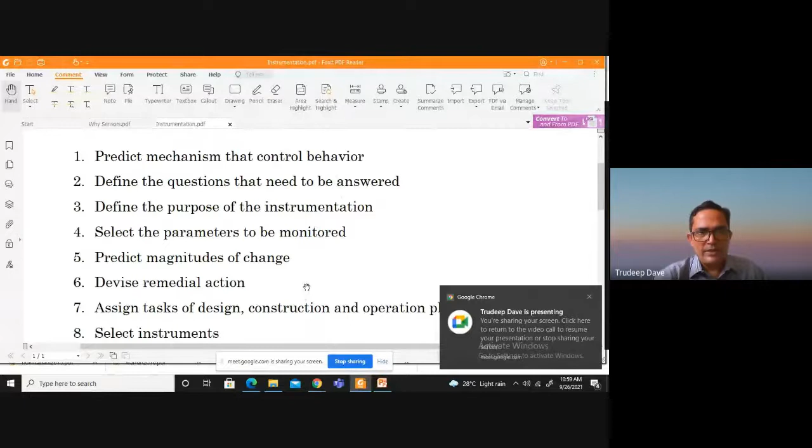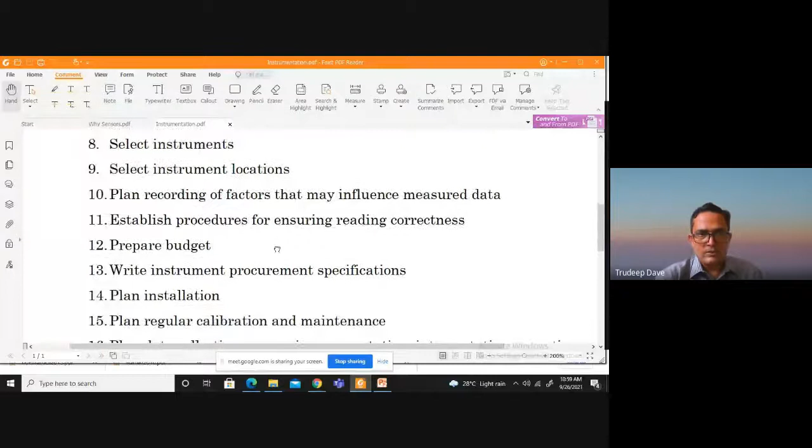So key to success, when we say we need to predict the mechanism that controls the behavior, we need to define the questions that need to be answered, define the purpose of instrumentation, select the parameters to be monitored, predict magnitude of the changes, then devise remedial action, then assign task of design, construction, and operation phase, select the instruments, select the instrument locations.

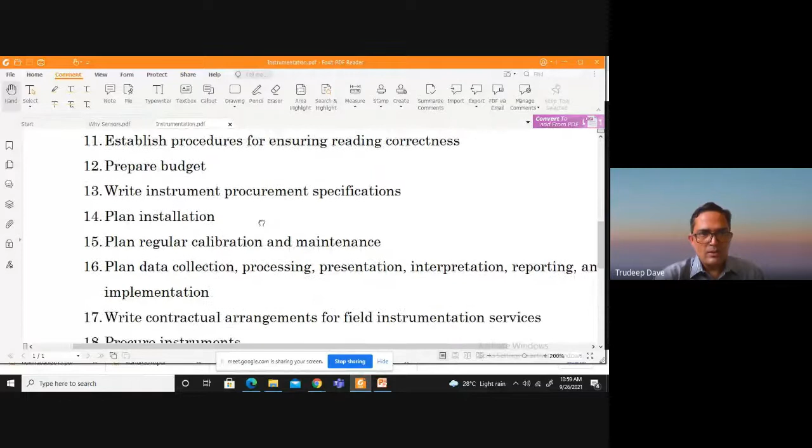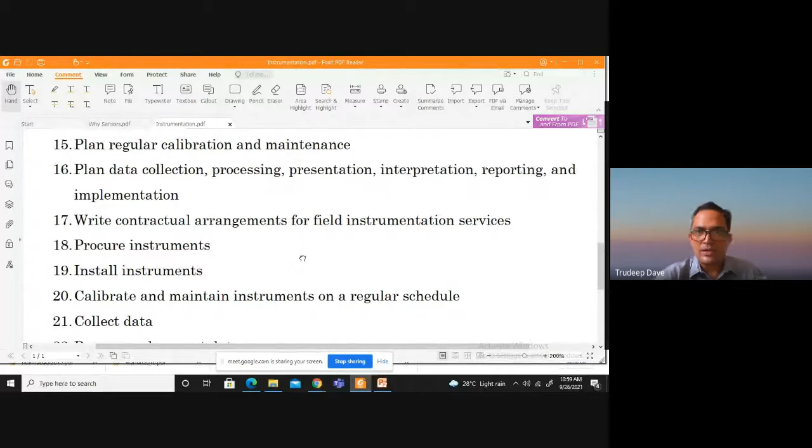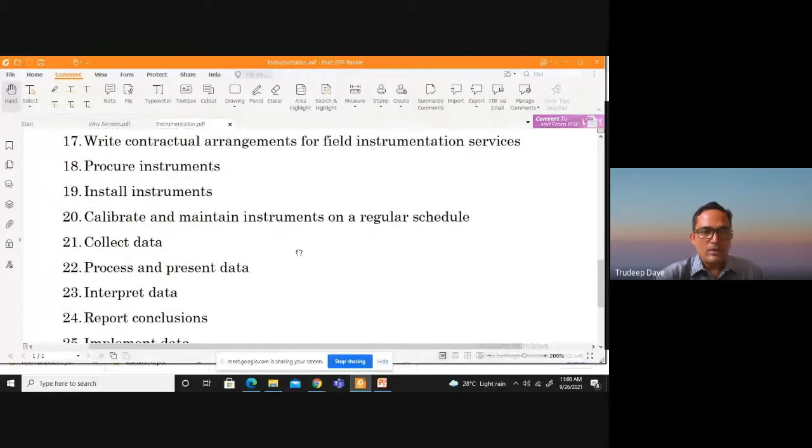Plan recording of the factors that may influence the measured data, establish procedure for ensuring the reading correctness, prepare budget, write instrument procurement specification, plan installation, plan regular calibration and maintenance, plan the data collection, processing, presentation, interpretation, reporting, and implementation. Write contractual arrangement for field instrumentation services, procure instrument, install it, calibrate and maintain instruments regularly, collect the data, process and present it, interpret it, report is to be prepared out of the data, and implement the data. So this is called the 25 links, or

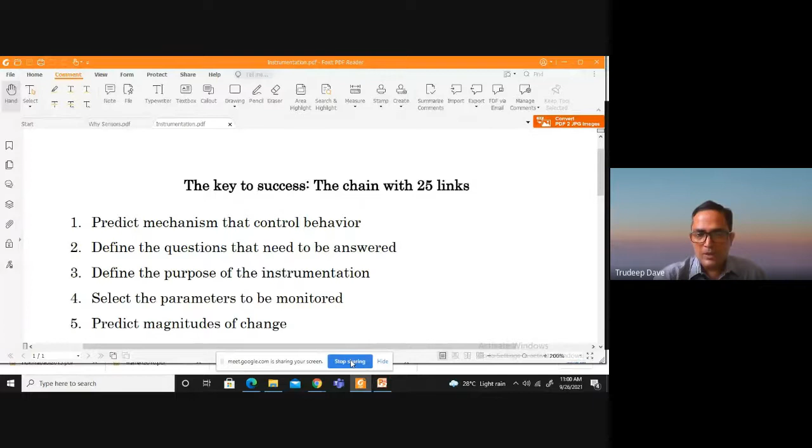key to instrumentation, or success to instrumentation. So this also I wish to share with you all, and I will be sharing with IGS Surat chapter. But as a student, when we try to pursue some research, I think we need to step by step understand it and answer these questions, which may probably reduce our hurdles and will lead to a better outcome out of the research.

So with this, I wish to conclude, and I'm again thankful to the IGS Surat chapter. If you have any question, please feel free to discuss. I will try to address, I will try to respond to these questions as per my knowledge.

Is there any question from participants? Sir, there is one question in the chat box that kindly throw some light on contactless instrumentation.

Yeah, so contactless instruments are mainly used, for example, when they are working on a laser principle, or they are optical sensors. So when it is working on the laser measurement, there is a strip which is pasted on the device on which we want to do the measurement, and then how the displacement between those markers is taking place is sensed by the light, and then it is monitored accordingly. So we can say that these are mainly used in the UTMs.

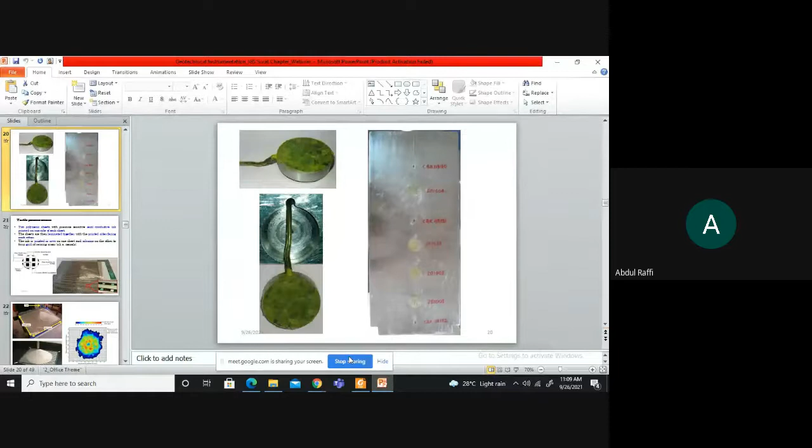Yeah, thank you, sir. I have one more question, but if permission is there, then I will ask, otherwise I will raise the question later. Maybe Solanki sir knows it better. You may ask, no problem.

Sir, the last question is, most of these strain gauges and all these instrumentations are obtained from abroad, I hope. And what about the service or any kind of requirement or accessibility of these sensors whenever we need? Also, is it used only for government buildings or even private buildings, private structures also?

It depends on the budget which has been allocated. So if a budget part is there for the continuous monitoring, definitely people would like to go for continuous monitoring. But if budget is the constraint, major of the construction activity is budget driven. So if we are having a tight budget, then probably we may not use the instrument during the monitoring, or once the construction is done, we accept that it is going to be in service for the design period.

One part is called continuous monitoring, the second part is accepting that it is going to be there during the service period. So with that intention, many factors are being involved into the design. When we say factors of safety are being used, that is to take care of extra additional load, to take care of uncertainties, and also to take care of any extra load not considered during the design. So all those things are being taken care of by the factors.